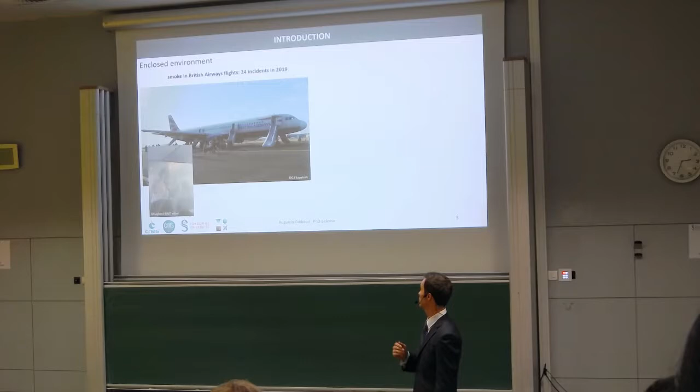Now, of course, this can be more problematic if you are in an enclosed environment, and pollutants can reach concentration above toxicity levels. This is why, of course, you cannot barbecue in an aircraft, but also why smokes and fumes are considered a major threat by aircraft carriers. For instance, this year alone, British Airways had to divert or emergency land up to 24 flights due to smoke in the cabin or in the cockpit.

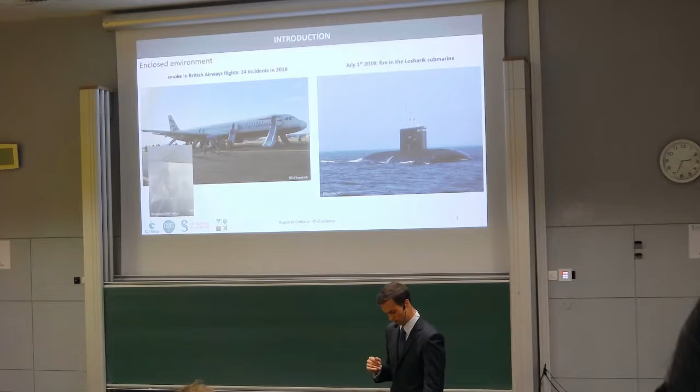High-tech facilities are not spared, as reminded this year by the tragic incident about a Russian submarine that killed 14 sailors. As such, you would understand that the people in charge of the space industry are quite concerned with respect to this danger, because as Alexander Lazutkin puts it, in case of a fire, you cannot just open a window to ventilate the room. This wise comment comes from him because he knows what he's talking about.

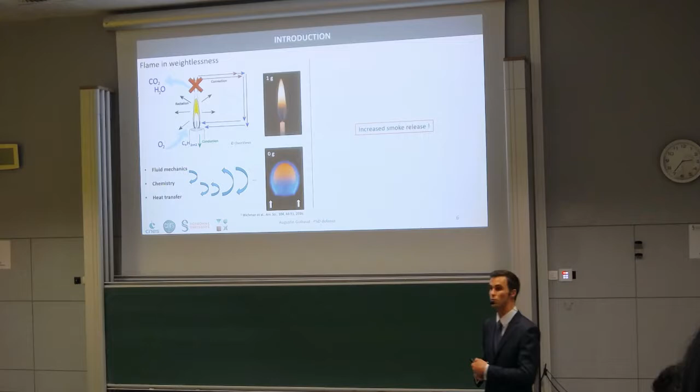In such a condition, then, the astronauts report that you have an increase in the amount of smoke produced, and this is one of the problems that we aimed at tackling in this PhD. To understand how smoke is formed, we need also to get back to the soot history, because throughout its history, soot can radiate in this broadband manner.

This is the reason why you can see the yellow bright aspect of a flame over this candle, but from a local perspective, this radiation corresponds to a heat sink. This means that local energy is radiated away, and hence local temperature drops, especially at the flame tip, where you can have the freezing of oxidation, hence soot release in the atmosphere. This full mechanism is usually known as radiative quenching.

So the question is to improve on the present situation. In which situation can we avoid radiative quenching? To do so, let's start with a simple example that was heavily documented on the ground. Quenching is also heavily studied for pollution, but also combustion efficiency concerns. And so this kind of co-flow ethylene flame gives us valuable information.

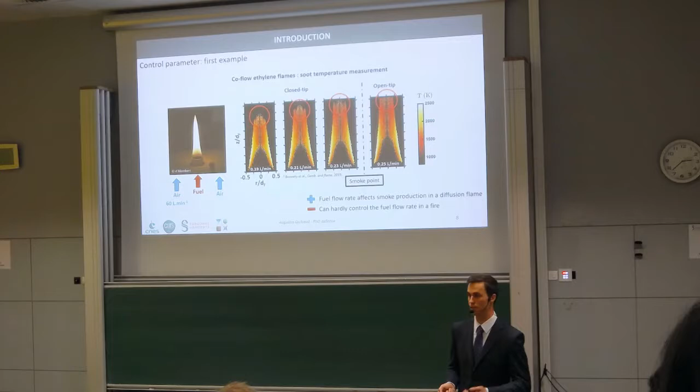Again, pressure can then be referred to as a control parameter, and this time it can be adjusted in a spacecraft. However, we should avoid rapid conclusions, since in the case of a fire, the complex coupling between the flame on one side and the fresh fuel on the other is pretty different from the pure gaseous flame that we studied so far. As such, we conducted flaming experiments in the absence of buoyancy.

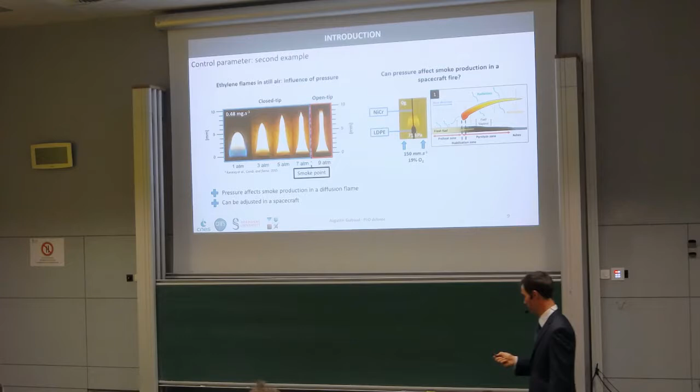What you're seeing here is a flame that's going to propagate downward over a nickel wire. So you have a nickel chrome metallic core, and on top of that, some low-density polyethylene coating on which the flame is set. The coating forms a melt here that will retract, and you can see here in the opposed flow configuration that the flame is set on top. We observe here the very same transition, and as such, pressure can be defined as a control parameter in the graph. So the question is, what are the other control parameters available?

If we keep the very geometry here of the opposed flame spread over a metallic wire, the control parameters are of two natures. You can either change the material properties of your sample, or you can change the atmospheric properties of the oxidizer flow. Now, from a pragmatic perspective, material properties with respect to space exploration are very likely to be dictated by other issues. For instance, radiation shielding, which is still not solved to this day, is likely to require the use of polyethylene, which is the very material that you see burning on the left.

Yet, atmospheric conditions are very likely to be devoted to fire safety issues, because as long as the astronauts can breathe, you can actually change the composition, but also the pressure or the flow velocity. And these are the parameters of interest that we will dig into this afternoon. The parameters that we will particularly focus on are the pressure, the oxygen content in nitrogen, and the flow velocity.

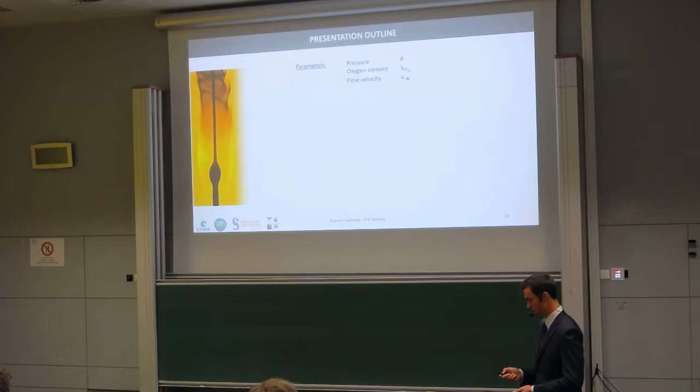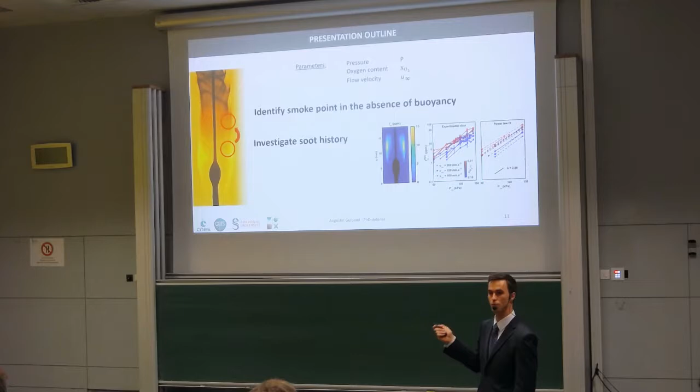And today's presentation will go from the macroscopic description of the situation in which you have smoke production and in which you do not have one. Then we will go deeper and investigate the soot history to understand which mechanism drove this transition from non-smoking to smoking flame. And eventually, since we now know the characteristics of soot properties in the flame, we will try to investigate how they affect the fuel through pyrolysis process.

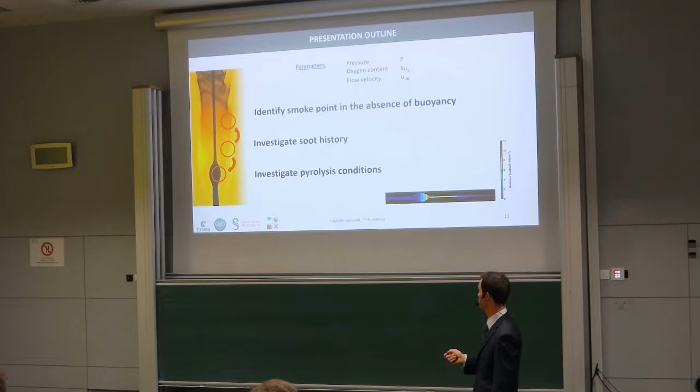First things first, we want to identify smoking condition. As such, we need two types of equipment. First, an equipment that will allow us to access weightlessness condition, and in the second time, we need an experimental setup that allows us to control at will the flow conditions around our samples. Then we will be able to report smoking tendency by running numerous experiments.

Accessing weightlessness on the ground from a scientific perspective is done through 4 different means: drop towers, parabolic aircraft, sounding rockets, and space station. They each feature their pros and cons, especially in terms of duration, and with respect to that parameter, any experiment should be conducted in the space station, because it provides virtually unlimited amount of time for combustion processes.

Any results that I will show you today are actually part of a much larger project, which is led by the Japan Aerospace Exploration Agency, that will send an experimental setup to the space station next year, studying the very same configuration that we will see today. However, the results I will show today are from parabolic aircraft experiments.

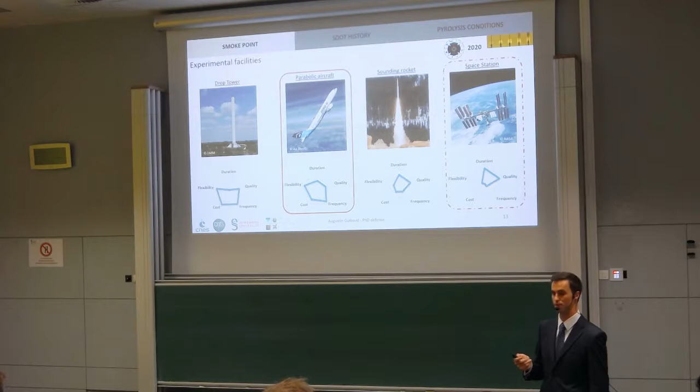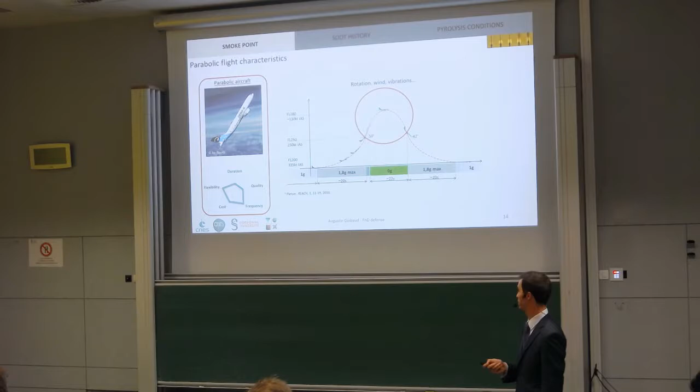Now, as the name stands, parabolic aircraft perform a parabola in the air. This allows the experimenters to obtain up to 22 seconds of weightlessness. However, it should be reported that throughout the ballistic trajectory that the aircraft performs, the unwanted acceleration from the engine of the aircraft, but also the effect of the wind or vibration of the structure, generate a residual acceleration field. As such, this period is referred to as microgravity, and the pilots do their best to keep any acceleration level below 5% of what is naturally felt on the Earth's surface.

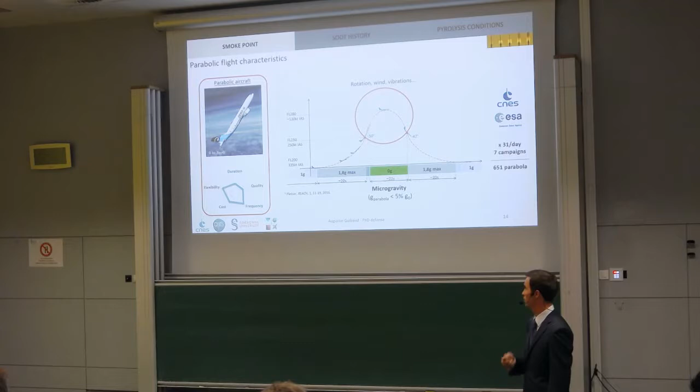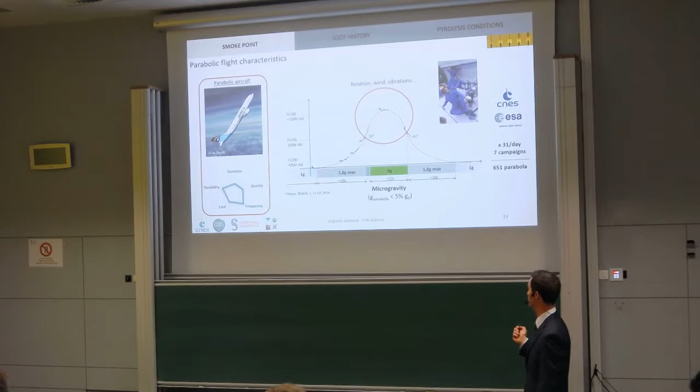Now, these parabolas were repeated 31 times per day, and we could take part over the last 3 years in 7 flight campaigns funded by either the French or the European space agencies. And this rhythm here is quite demanding from an experimental perspective. From a more personal point of view, it's more than enough to have a lot of fun. However, it demands the creation of a very well-designed experimental setup.

As such, an experimental rig was designed and built at Institut Jean Le Rond d'Alembert since 2012. You can see here the core element, which is a combustion chamber. In this combustion chamber, a flow is set from bottom to top, and you want to be able to tune the pressure, oxygen content, and flow rate. The oxygen content between 0 and 21% and the flow rate between 0 and 300 millimeters per second is set by using gas cylinders of compressed air and nitrogen.

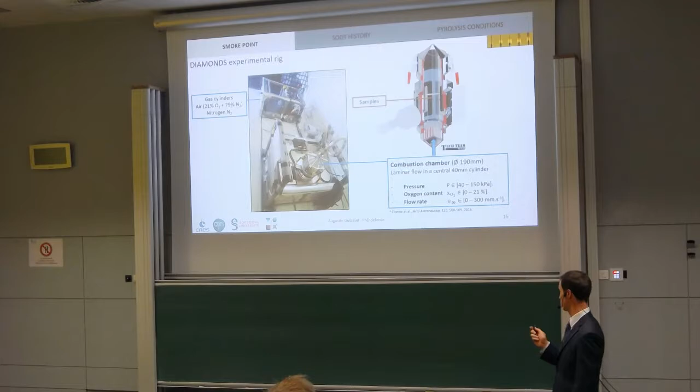Any experiment is recorded using a 3-CCD camera that is acquiring frames at a 40 frames per second rate, and a backlight can be used on the other side of the flame. When the backlight is set off, as shown here, you can capture the spontaneous emission of the flame in the blue, green, and red channels. If you add an additional backlight, you can now see the absorption of the soot particles at the flame plume. Sorry. Now, if you set alternatively the backlight on and off, you can capture both information simultaneously.

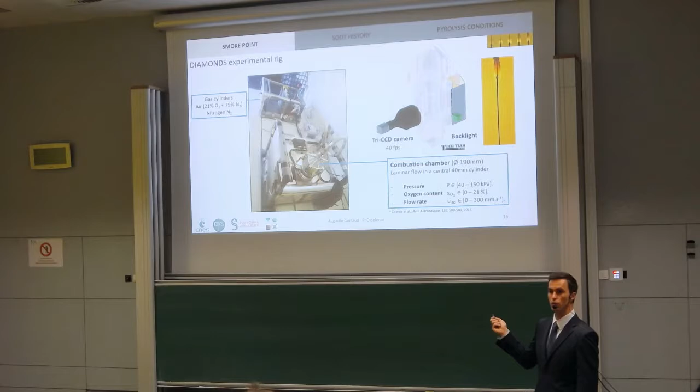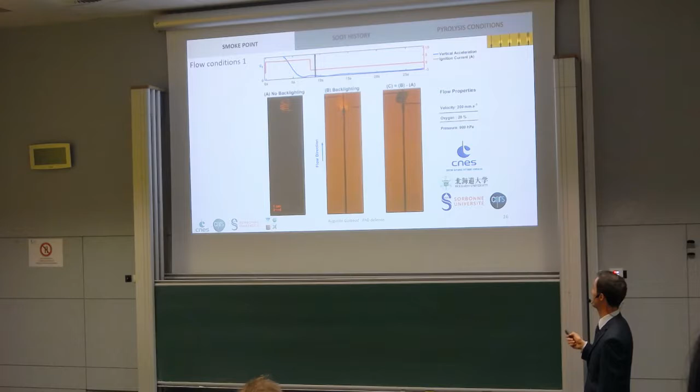As such, we now have all the tools we need to run our experiments. So let me show you one result. You're going to see here on the left the non-backlighted images separated from the backlighted images at the center. And if you subtract the first 2 images, then you're only left with the absorption field through the flame. So if we play this movie, we ignite with a Kanthal wire at the top, and as gravity falls down and reaches the microgravity level, you can see the flame is established and propagates until it hopefully reaches steady propagation within the 22 seconds allotted.

As you can see here, soot particles absorb in a broadband manner the backlight in the flame. However, there is no presence of a trail of smoke behind the flame, and as a result, this condition here is reported as non-smoky conditions.

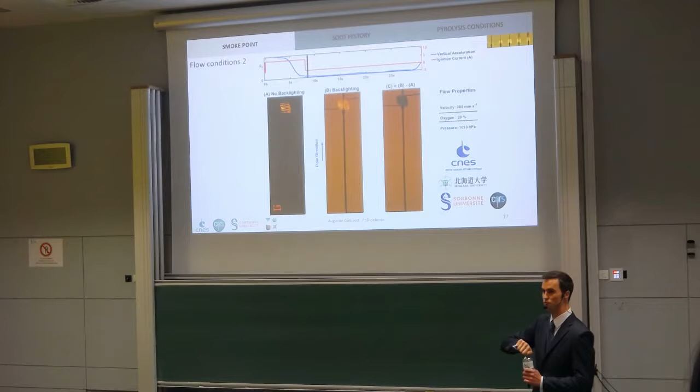If we now change just a bit the pressure, well, brace yourself. So you can see again the flame ignited and propagating along this wire. However, this time you can distinguish a clear trail of smoke that is formed at the back, which shows us that quenching phenomena occurred in this situation. As such, this new set of conditions is reported as smoky.

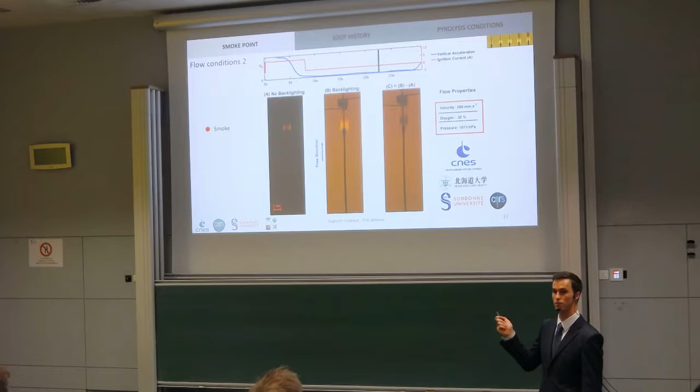Now, if you just populate the graph by repeating one experiment in each parabola, you can see here the variation of the smoking tendency as a function of pressure and oxygen content at a set flow velocity. From such a graph, we can conclude that pressure and oxygen content both play a role in the transition from non-smoky flames to your left to smoky flames on the right.

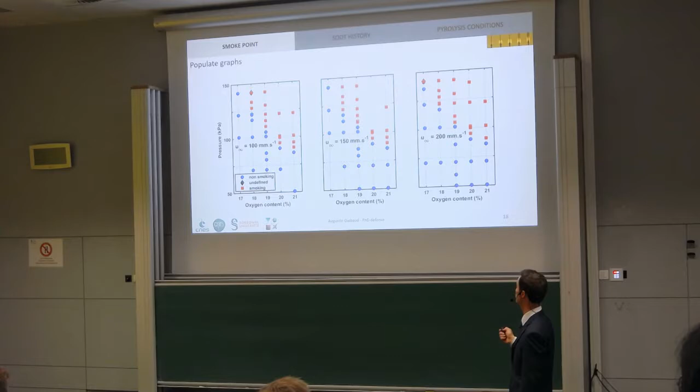If we repeat this graph at different flow velocity, we can see here that in the 100 millimeters per second to 200 millimeters per second range, flow velocity doesn't seem to play a major role in the position of this boundary. To get further insight, we just plotted the three boundaries on the same graph, and running a genetic algorithm, we were able to sort from this arbitrary equation the value of the exponents. Such exponents support again the assumption that pressure and oxygen content play a major role, but flow velocity has a marginal impact on the smoke tendency.

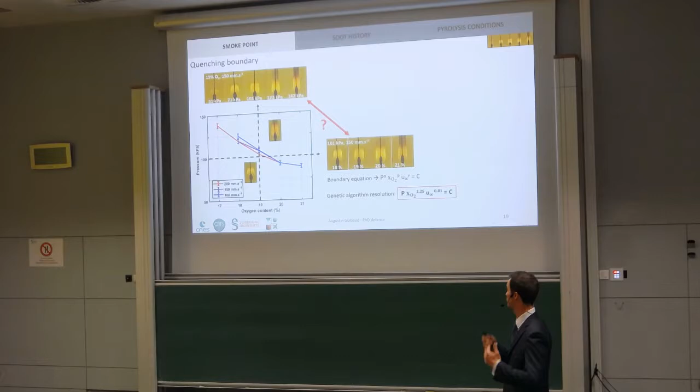Now, if this can have some technical application, from a scientific perspective it doesn't explain anything at all. We have no clue as to which mechanism drives the transition from a non-smoking flame to a smoking flame as you increase the pressure at set oxygen content and flow velocity. And we do not know as well what happens if you only increase oxygen content. For instance, we do not know whether or not both phenomena are driven by the same mechanism. As such, the next natural step was to investigate what were these mechanisms driving quenching in each situation.

Now, if you recall the first graph, the oxidation or quenching phenomena are the last bit of the soot history. So to understand what happens at the flame tail, we need to investigate what happened before. And to investigate what happened before, we will first look at soot formation by studying the fuel release rate, and thus understand how much polycyclic aromatic hydrocarbons are formed in a flame. If we want to look at the soot growth mechanism, we will have to dig a bit into the soot residence time, and the radiation can be captured by estimating the radiative losses in the flame.

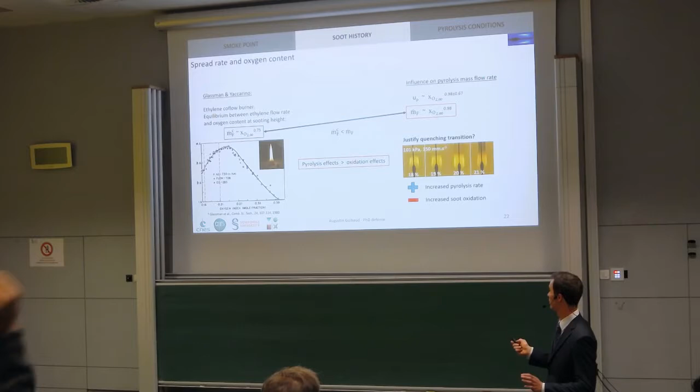Of course, this very gross conclusion should be taken very carefully. First, because you can see here that the standard deviation is very high, and then because the values taken here and the values we found are fairly close. However, this gives us a nice approach to get some insight about the mechanism with respect to oxygen content.

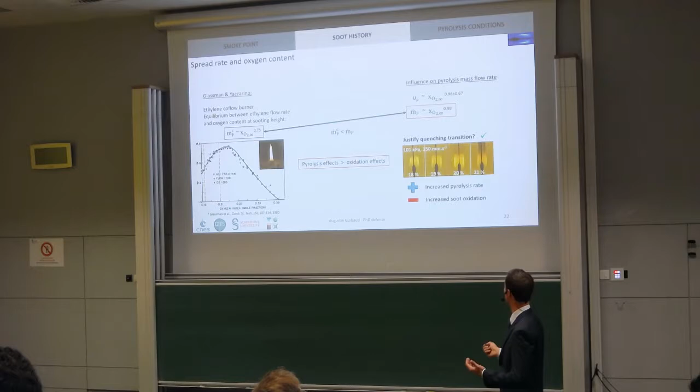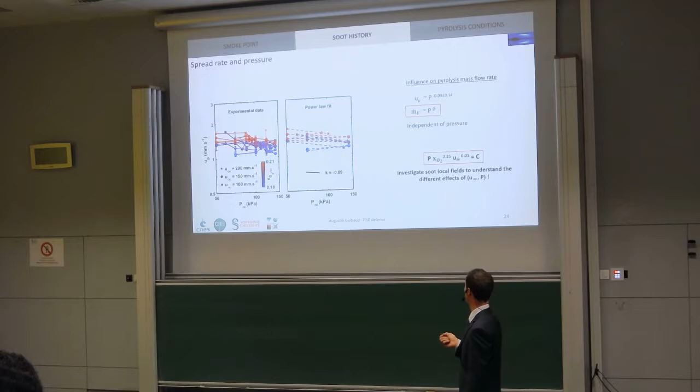And if you do the same thing with pressure, you can see again that pressure has a marginal impact on the fuel flow rate. However, observations that we reported earlier said that pressure has a huge role on the smoke point transition, whereas flow velocity has a marginal impact on this phenomenon. And as such, we need to dig a bit deeper to understand the different effects of flow velocity and pressure.

To do so, we now need a more precise description of the soot inside the flame. And to do so, we need to be able to access more data than just this macroscopic observation. Yet the present equipment that we have, with a broadband backlight on one side of the flame and a 3-color camera on the other, was designed first to resemble that of the modulated absorption emission technique.

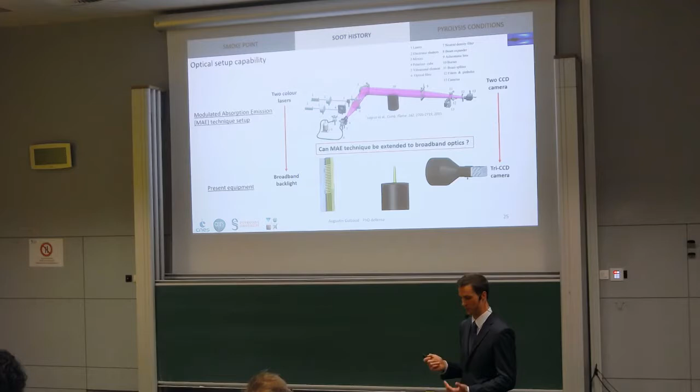To answer that question, we need to get back to the fundamentals of the MAE technique, which I will recall now. The MAE technique uses the axisymmetry of a flame. So if you observe at a given height in the flame, you can discretize any properties along concentric rings, as long as the properties do not vary too fast in the flame. As such, you then want to solve the radiative transfer equation.

So this radiative transfer equation shown here describes how much energy is carried by a light beam crossing a participating medium. The energy is increased by local spontaneous emission, decreased through absorption and scattering, and potentially increased by scattering from light beams with different orientations.

However, this equation here is way too complicated to be solved from our experimental setup observation, and as such, under a strict list of hypotheses that I will not describe at the moment, but we can get back to them in the questions, we can arrive at a much simpler expression of this equation that only considers the spontaneous emission and the absorption field in the flame.

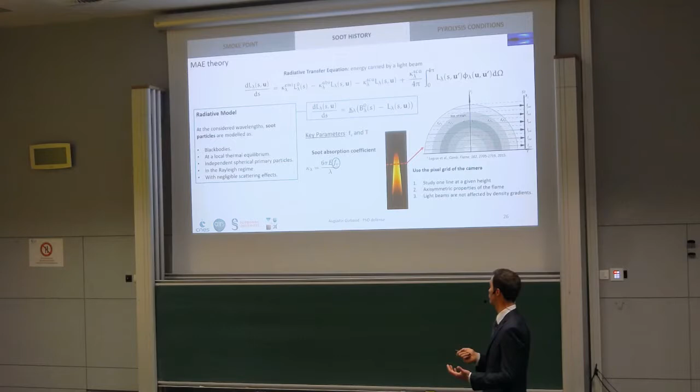In this equation, the parameters of interest, the soot volume fraction and temperature, are embedded first in the soot absorption coefficient and in the spontaneous emission term, which can be modeled through a black body emission law.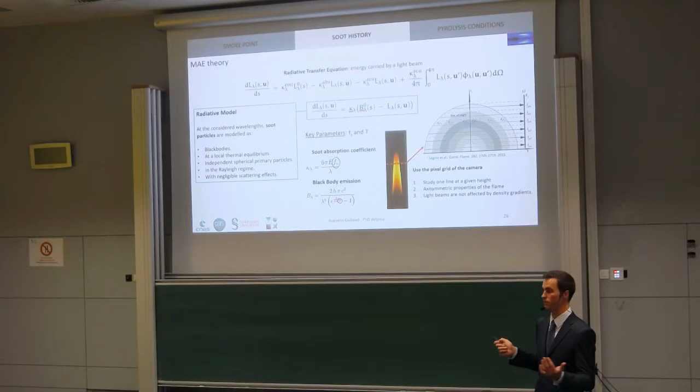The procedure of the modulated absorption emission technique is not too difficult. The idea is just to integrate this equation along light beams. So to obtain parallel light beams here, we use different optical setups. In our case, we required the use of a telecentric lens that collects only light beams coming from infinity.

As such, if you integrate this equation along the first light beam without any incident light source, you can see here that the energy you collect over a pixel of your camera is the sum of the spontaneous emission at each location, potentially absorbed through the rest of the flame. If you add an additional light source at the back, you can see now that the very same term from the flame spontaneous emission remains, and we have an additional term which corresponds to the emission of the backlight that has been absorbed through the flame.

Now the parameters of interest are intimately entangled here, and as such we cannot solve these equations directly. But from a simple analysis that was conducted by the founders of this technique, if we can subtract these two equations and potentially divide by these unknown parameters at the front, we are left with the exponential decay through the flame. And as such, using discretization on these different rings, you can find, using an onion peeling method and potentially a Tikhonov regularization, the absorption field at each layer that you can relate to the soot volume fraction.

Now, such a complex operation can be very easily done experimentally because the subtraction corresponds to the subtraction of an image of the spontaneous emission of the flame from an image of spontaneous emission of the flame with an additional backlight. And the prefactor that you see here is just the energy from the backlight in the absence of a flame.

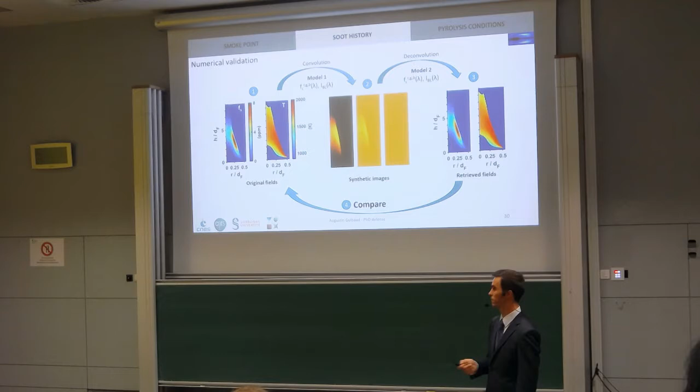We run a convolution algorithm, so we integrate the radiative transfer equation through the flame. We generate the synthetic image which resembles what we would capture with a camera. And then we go through the deconvolution process to retrieve the soot volume fraction and temperature fields. By comparing the original and retrieved fields, we can then assess the quality of the method. This allowed us to first investigate the different hypotheses made, which are described in the appendix of the manuscript. And then this also helped us improve on the methodology.

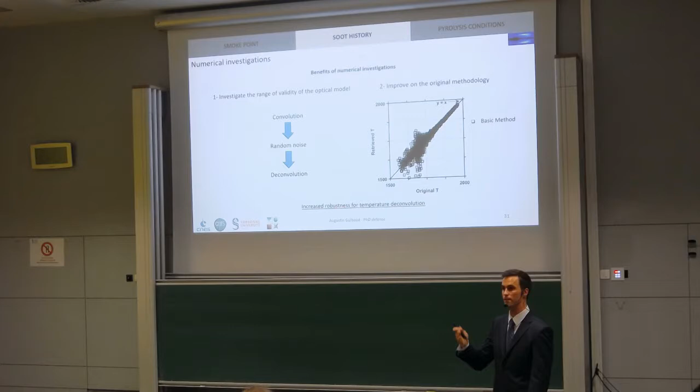Just to give you a quick overview, if you look at the temperature profile in the flame, your objective when you run deconvolution is to retrieve exactly the same thing as the original. So you want to find yourself on the x equal to y curve. The original method, in the presence of additional noise on the synthetic image, provided us this kind of data. Now with the new method that we developed, we were able to better converge on the x equal y axis, which means that we can better predict the radiative losses from soot in the flame.

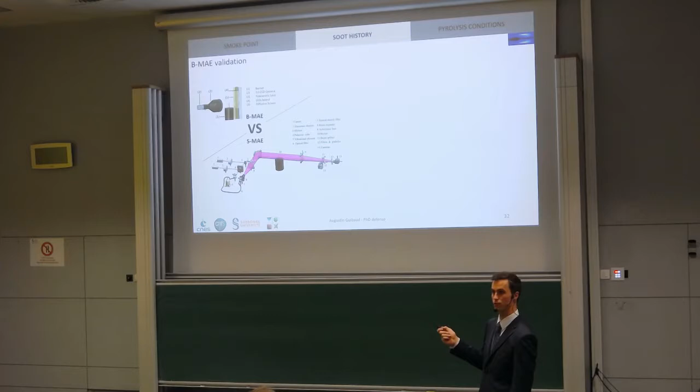Empirical investigations were carried out. We validated our setup by comparing it to the original spectrally resolved one over a candle that you can see here in the center. And these are the fields that we could obtain.

Of course, the results from the new broadband modulated technique shown on the right here are of lesser quality than the original. Comparing with the spectrally resolved data, the soot volume fraction and temperature are recovered with proper topology and a sufficiently accurate precision on the value.

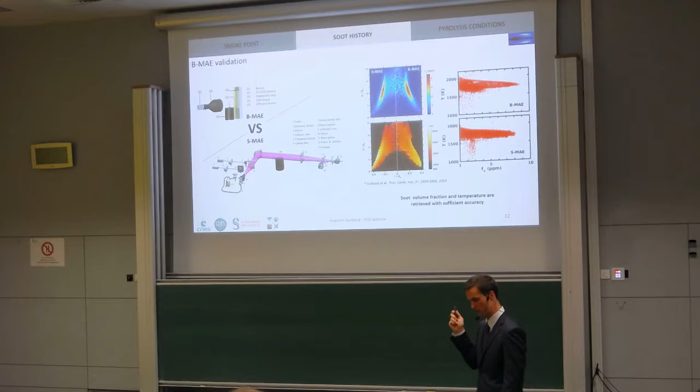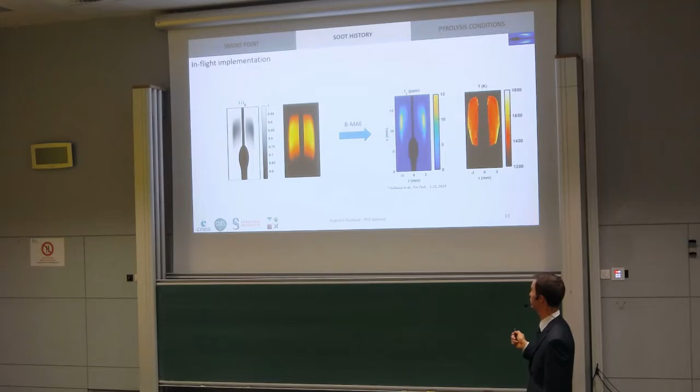And as such, the distribution in the soot volume fraction and temperature field suggests that we can still well predict the radiative properties of the flame we wish to study. As such, this methodology was performed over the average fields obtained in parabolic experiments. This allowed us to obtain this kind of soot volume fraction and temperature data, and we could, as we first guessed, observe that in this environment there is an increased amount of soot that is formed.

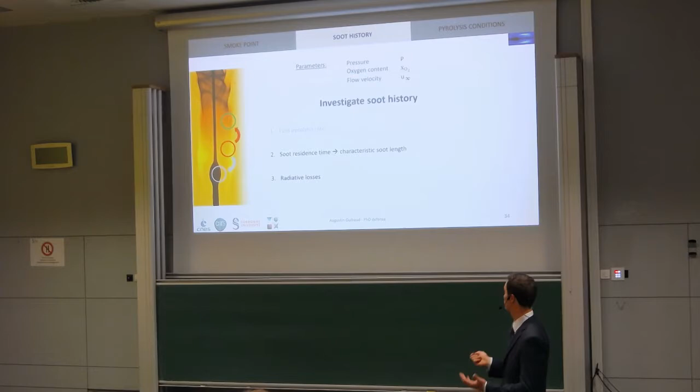So if we want to understand how the soot properties affect the quenching, we can do this by studying the soot residence time and radiative loss. Soot residence time cannot be accessed via images, but we can define a characteristic soot length. The characteristic soot length is defined as follows. You want to find the location at which polycyclic aromatic hydrocarbons are formed, and we suggested that this location could be collocated to the presence of the melted droplet.

Because if you have here the fuel that transforms from the solid to a liquid state, you can clearly see over a nickel chrome wire that this droplet retracts, and we assume then that polycyclic aromatic hydrocarbons could be formed as soon as the fuel reaches a liquid state. So we define the first position here, and the second position that is shown here corresponds to the maximum of the radially integrated soot volume fraction.

This position here suggests that you have a balance between the soot formation and growth mechanism and the soot oxidation mechanism. Oxidation dominates above this line, while formation and growth below. We can then define here lengths over which these dominate.

Now, if we report this length and compare it with our two parameters of interest, which are the flow velocity and pressure, you can see here that the soot length is marginally affected by flow velocity. This means that if you have a constant length but varying velocity, you would have different residence time, since in microgravity the forced flow dominates the transport mechanisms. This means here that soot residence time decreases as the flow velocity increases.

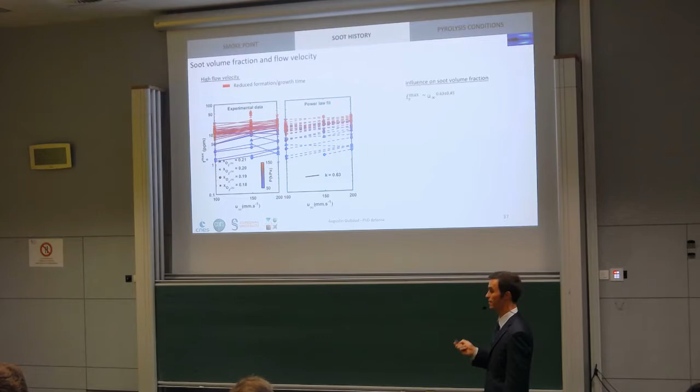Experimental data here cannot provide us a deeper insight of the mechanisms in the flame, so we went through some numerical simulation and investigated soot volume fraction. We investigated this configuration at one value of pressure and oxygen content and tried two flow velocities, 100 and 200 millimeters per second. We checked by comparing the numerical data with the experimental one that soot volume fraction and temperature topologies were consistent, and also that we had a proper value of the flame standoff distance.

And numerical investigation allowed us to highlight that the soot formation rate was actually increased at higher flow velocity. And this is because if you have a smaller time, then you have less radiative losses. So the local temperature is higher, and hence the soot formation rate is increased. And in our situation, of these two mechanisms, the second mechanism prevails, justifying why we can find a higher soot volume fraction.

Looking now at the effect of pressure, we see again that pressure has a marginal impact on soot length. However, as here the experiments are all performed at a set flow velocity, this also means that the soot residence time is not affected by pressure.

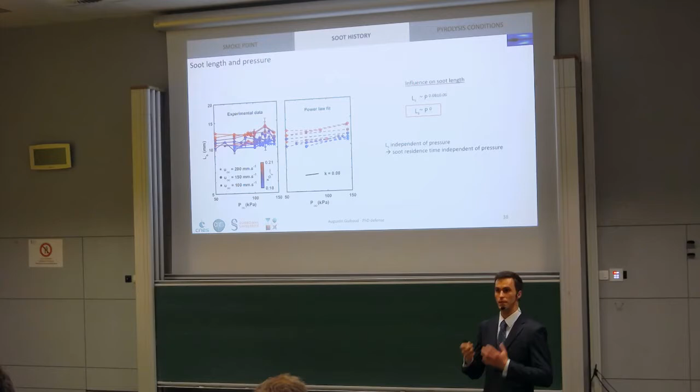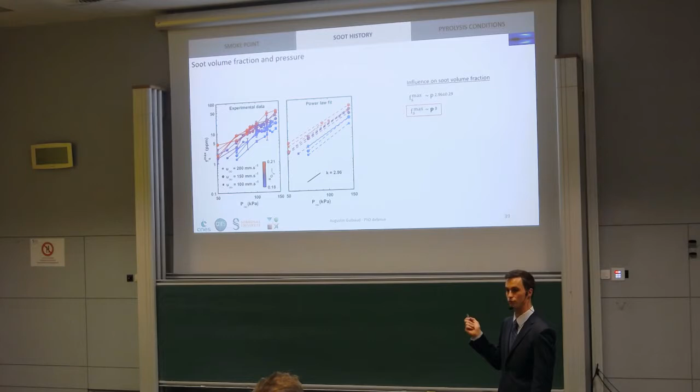As such, it is quite valuable to understand the effect of pressure on the soot formation rate, since all the other parameters seem to be set. And if we report soot volume fraction as a function of pressure, one of the major findings is that we can find a cubic dependency in our geometry of the maximum soot volume fraction as a function of pressure. If we bear in mind that we have this set fuel input and constant formation length, then it means that the soot formation rate follows a cubic power law.

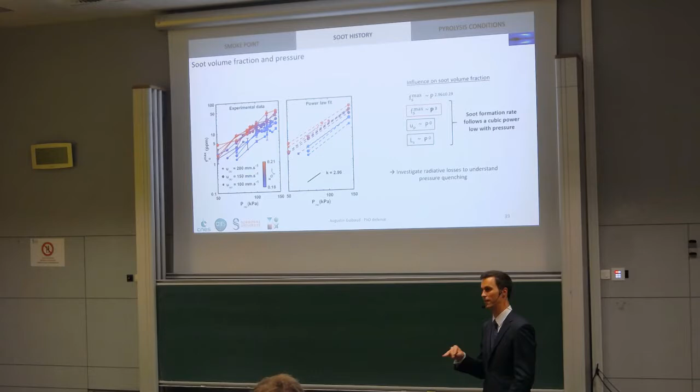Now this increase in soot volume fraction may be responsible for the transition we saw from non-smoking to smoking flame, and as such we wish to investigate a bit more about the radiative quenching in the flame, the soot radiative properties in these flames. The best thing to do is to give you a small example. So what you see here are three flames that are established over always the same sample. And you see here for a set value of flow velocity and oxygen content, three different pressures. So a low pressure flame here, intermediate value here, and a high pressure flame on your right.

And we report at different locations in the flame, so from Z1 to Z4, the amount of soot volume fraction to your left and the temperature to your right. Data at low pressure are reported in blue, intermediate pressure in orange, and high pressure in yellow. If we look at the height Z2, which corresponds to the first location where we have a significant amount of soot in the different flames, you can see here that high pressure flames correspond to the highest soot load. However, the temperatures from the highest and intermediate pressure flames are quite similar. We do not report here the temperature from the low pressure flame since we have a low amount of soot volume fraction, and as such we are out of the confidence range.

Now, if we investigate what happens a bit higher in the flame, you still see here that there is a larger amount of soot at high pressure. However, this time the two temperatures start to diverge. The idea here is that soot at a lower height in the flame with the same temperature means that you have increased radiative losses. And if you have increased radiative losses, then higher in the flame you will find a lower temperature.

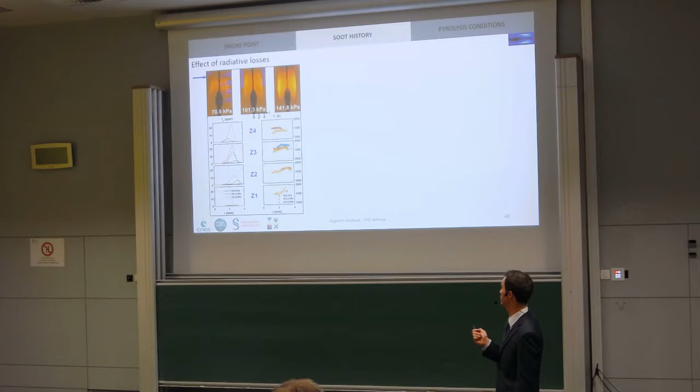If we keep digging at what happens higher in the flame, you can see here that eventually at the intermediate pressure situation, the soot has been oxidized as compared to the Z3 height. But with respect to the highest pressure, you do not have any more soot oxidation. And this can be linked to the temperature you see to your right here, where it seems that the new temperature found in this high pressure flame corresponds to the freezing of the oxidative reaction. From this simple example, two questions arise. First, can we identify a critical value of the soot radiative losses? And can we also identify a critical temperature for oxidation?

If we want to investigate the soot radiative losses in the flame and be able to plot the effect of pressure on the soot-related radiative losses, we need to be able to estimate them over the whole flame. As such, the fields that we have so far of soot volume fraction and temperature allow us to plot detailed mappings of the soot radiative losses in the flame through this very simple and calibrated model. By integrating over the whole flame the value of the soot-related radiative losses, we could produce for a set value of flow velocity and oxygen content the evolution of radiative losses with pressure. And you can see here that there seems to be a threshold at a value of about 5.5 watts.

Now the absolute value here is only relevant in this simple configuration, and as such we prefer to compare this value with a typical one from the spread. Bearing in mind that a constant oxygen content means that you have a constant spread rate, we can compare this value with the heat release rate of our spreading flame. And we can find here that the soot in the flame corresponds to approximately 20% of the heat release rate at this transition.

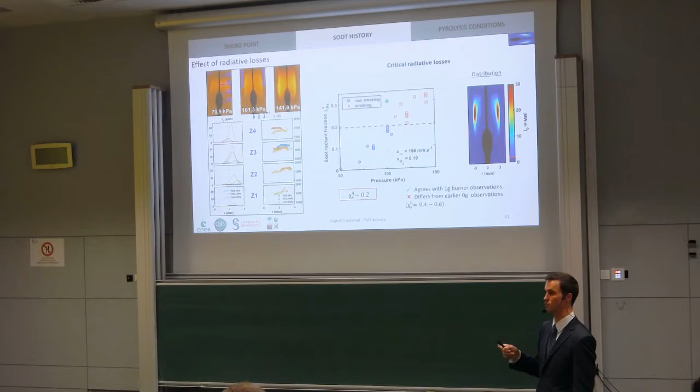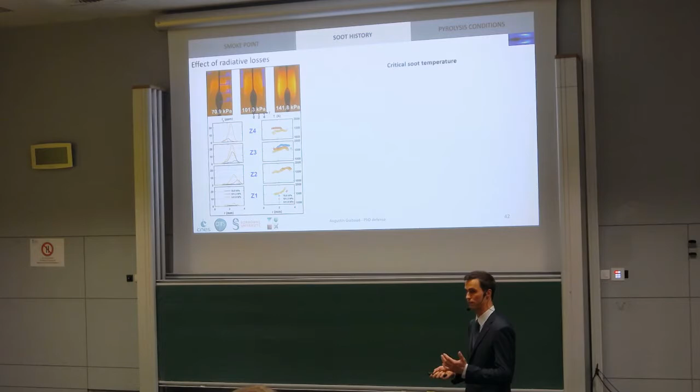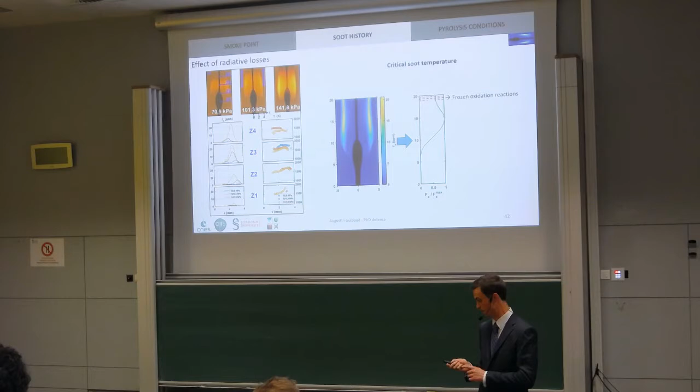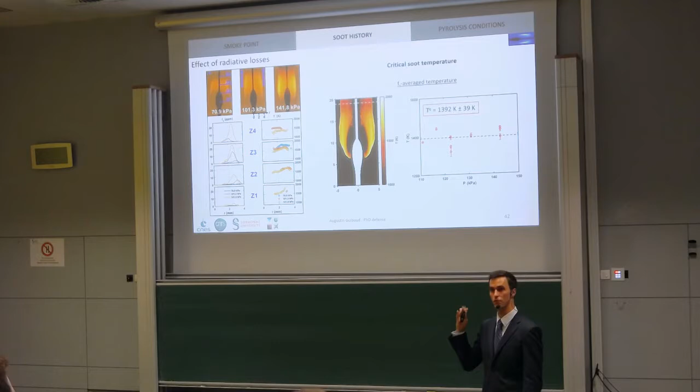As such, if we report the temperature at this location in the flame, and if we average this by the distribution of soot volume fraction, we find in the situation of smoking flames, so at high pressure, the temperature at this location. And it seems in one set of experiments that is shown here that you have this critical temperature of 1400 kelvins, which is again quite consistent with observations made at normal gravity with respect to soot mechanisms, but differs again from the same set of observations in microgravity that reported temperatures as low as 1000 kelvins.

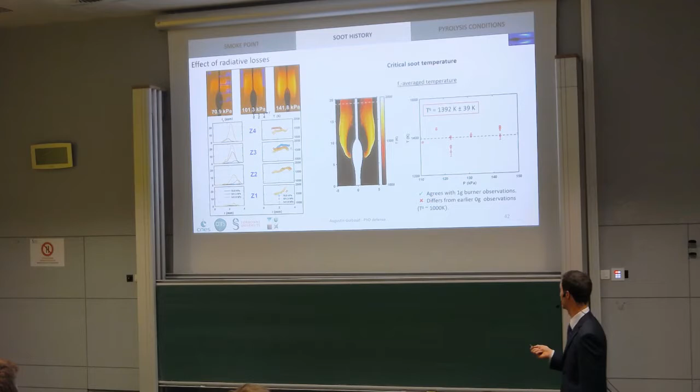Now, if we were able to have some information and all these insights about what happens with respect to smoke production, having this detailed mapping of soot properties in the flame is also fairly valuable if you want to understand what happens at the sample surface.

So just to recall what we've seen so far, we've seen that if you increase oxygen content, you increase the pyrolysis rate, and this seems to be linked to the quenching observation that we can find. If you increase the flow velocity, you have a steady pyrolysis rate, but you reduce the formation time. However, this mechanism is balanced by the soot formation rate that increases the maximum soot volume fraction in the flame. And if you vary the pressure, then you do not affect the pyrolysis rate, you do not affect the formation time, but the formation rate is drastically changed with the cubic power law. And as such, quenching can be observed at high pressure.

And so what I was starting to talk about before I noticed that I added an extra slide, is that if you have all the properties of the soot in the flame, you can then study the sample surface. This will impact the pyrolysis mechanism, which can be critical with respect to the different chemical production and especially soot production. Soot radiative feedback and soot radiative balance will then be our last topic of interest in today's presentation.

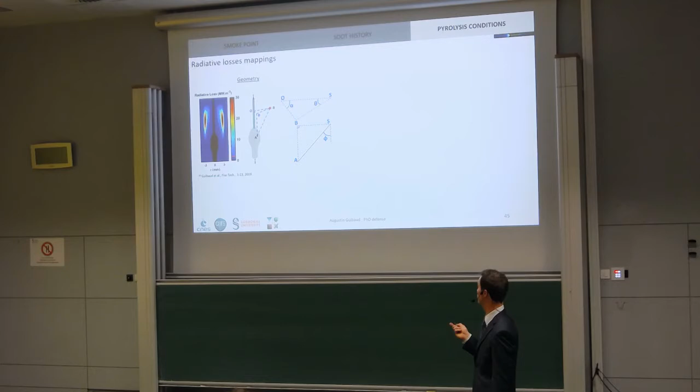As a matter of fact, since we could produce detailed mapping of radiative losses in the flame, it's actually fairly straightforward to obtain the radiative feedback at the sample surface. By conducting an optically thin assumption and just running some simple geometry over the samples, you can actually produce mapping such as this one of the heat feedback to the wire surface. This feedback can come in very handy if you want to understand the local pyrolysis condition with respect to the amount of radiative feedback at each location of the fuel surface, and also if you want to understand the net radiative balances at the fuel surface.

Integrating over the whole sample, we can see that in our simple geometry here, we have more or less, no matter what the pressure is, 6% of the total radiative losses in the flame that are fed back to the wire surface. But if we focus on the location of the fuel, which is to your left here, with the melted droplet you recognize here and the unburned surface of the fuel to your left, then only 3% of the radiative losses in the flame are fed back to the surface.

Now, if this can seem a very small number, we should bear in mind that up to 30% of the heat release rate from the flame concerns radiative losses. And if we have this figure with soot-related radiative losses, it may likely concern other combustion products.

This data can come in very handy for the development of semi-empirical theoretical models. You can see here a model that has been developed and published this year by a Japanese team. What they're doing here is trying to forecast the spread rate of the flame in the same configuration by defining the different heat transfers in the flame.

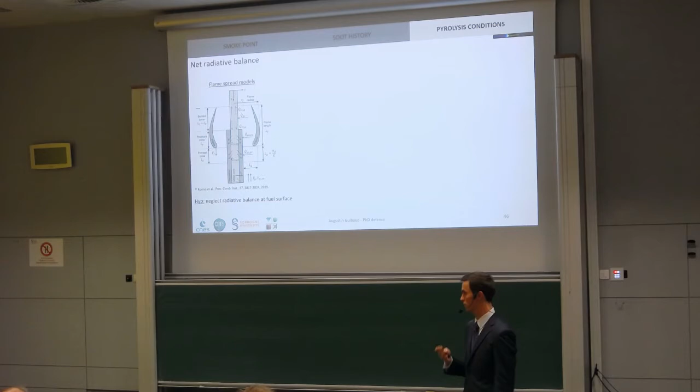Now, when it comes to radiative heat transfer, they didn't have enough information, and so they suggested that they could neglect the radiative balance at the fuel surface. This is a very relevant hypothesis. However, from our measurements, we can find the net flux from the flame to the sample surface, and if we can access the radiative losses from the sample to the ambient atmosphere, we can have access to this net flux.

However, the heat flux from the sample to the surrounding atmosphere requires finding a fuel surface temperature. The fuel surface temperature cannot be very easily accessed through material properties, since the pyrolysis of low-density polyethylene is fairly complex. This material pyrolyzes between 400 and 750 kelvins, and as such, we cannot forecast which of these two temperatures is more likely to resemble that of the sample surface.

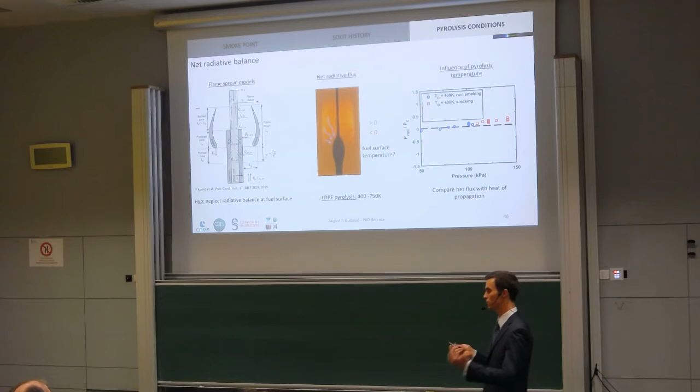However, if we take these two extreme cases, if we assume that the temperature at the surface is 400 kelvins, we can compare the net radiative flux with the flux required to sustain propagation. And you can see here that in this condition, sorry, little spoiler, the net radiative flux is negligible and can be neglected before this standard flux. However, if you report a surface temperature of 750 kelvins, then you will drastically overestimate the spread rate by using a net balance equal to 0, because you're going to miss something that is almost equal to a -1 factor.

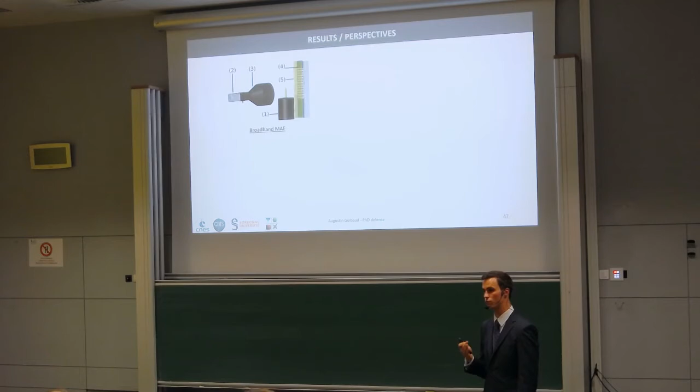Now, if we just summarize what we've seen today, first of all, one of the core elements of this PhD was the development and assessment of a new optical setup that extended the modulated absorption emission technique to a broadband system. Then its implementation in parabolic flight allowed us to repetitively carry out experiments and obtain this kind of mapping, which shows the effect in the flame.

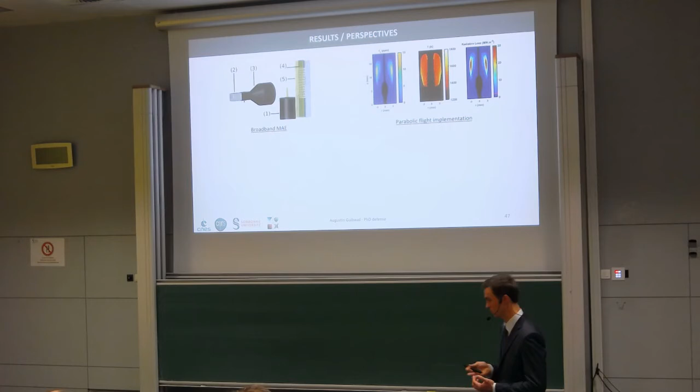By repeating the experiments, we can then plot graphs that, even though the quality of each line is not perfect, via data agglomeration allow us to find the trends, the influence of the ambient flow conditions on soot properties. And last, we could then understand a bit better how the quenching mechanism happens in this environment through the use of these mappings.

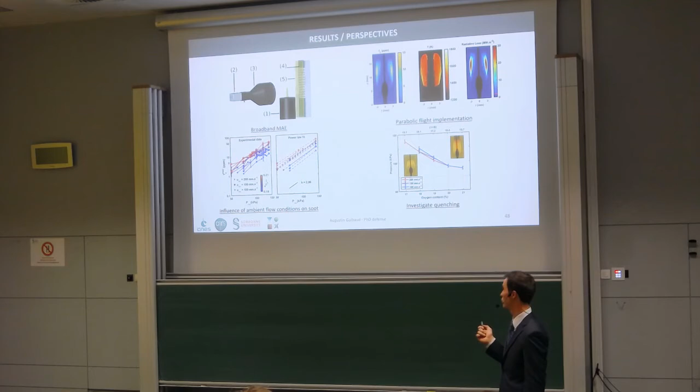Now, of course, anything that has been shown today has triggered more questions than it has answered. For instance, developing a new broadband optical setup requires perfect knowledge of the soot properties in the flame. In this novel microgravity environment, soot properties are still not very well understood, and as such, a new PhD starts now and will deal with the sampling technique that allows us to find soot morphology through TEM observation.

For the parabolic flight implementation, we saw the limitations of parabolic aircraft, and we will conduct experiments next year with the same configuration, but with much less gravitational acceleration in the space station. As such, we can confirm or refute the trends we've identified, which may be blurred by gravitational effects.

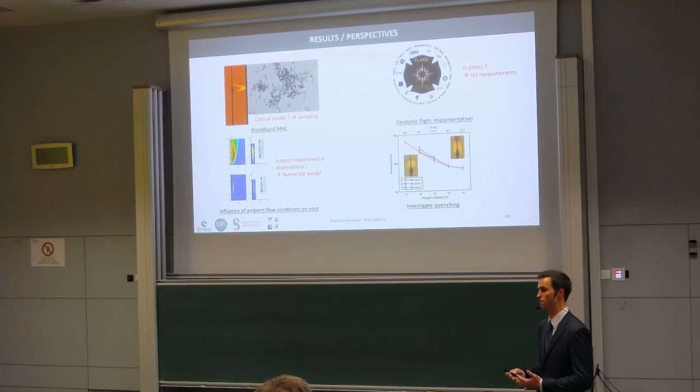While we have been able so far to identify the influence of some of the ambient flow conditions, we still have a lot of data to process. In addition to more experimental post-processing, we can also interact with numerical models to understand more deeply the phenomena that are not accessible through experimental measurements. And last, while we've been able to investigate quenching, we always see the same configuration and the same material, and this is a huge limitation that we will try to overcome by investigating different fuels and different geometries.